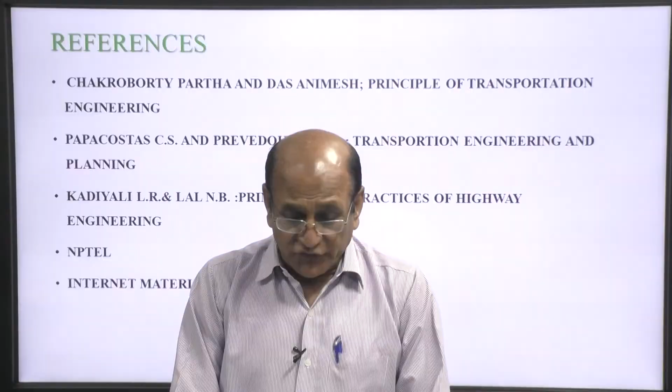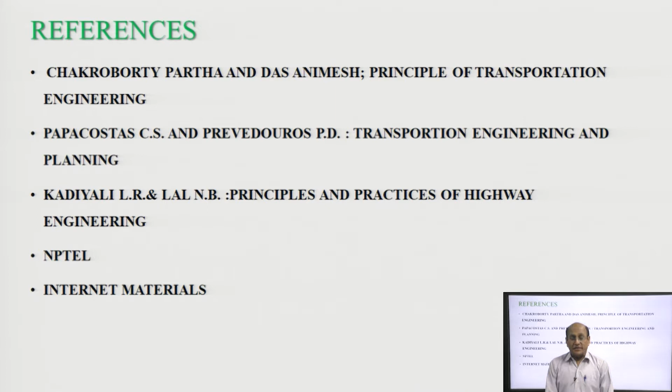The references we have taken are Chakroborty Partha and Das Animesh, Principle of Transportation Engineering; Papacostas CS and Prevedouros PD, Transportation Engineering and Planning; and Kadiyali and Lal, Principle and Practices of Highway Engineering. Some material has been taken from NPTEL and some from the internet.

Today's contents: trip distribution, introduction, basic considerations, trip distribution matrices, methods of trip distribution, growth factor method, uniform growth factor method, average growth factor method, Detroit method, and gravity method.

So, trip distribution matrices are of two types. One is the production-attraction, PA, matrix, and the second is the origin-destination, OD, matrix.

The production-attraction format of the trip table should be converted into the origin-destination format to get the actual direction of the trip between the TAZs.

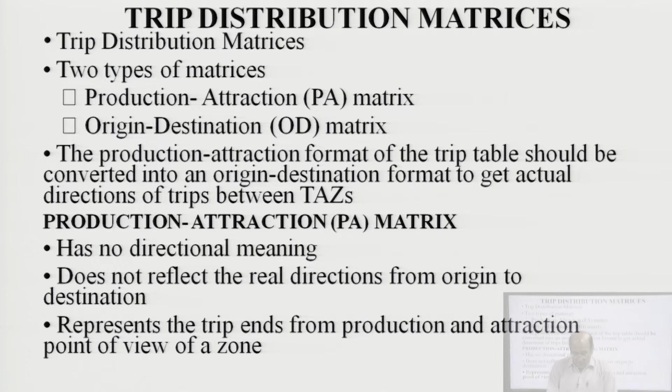The production and attraction, PA, matrix has no directional meaning. Whatever trips are produced or attracted have no direction, and it does not reflect the real direction from origin to destination. It represents the trip ends from the production and attraction point of view of a zone.

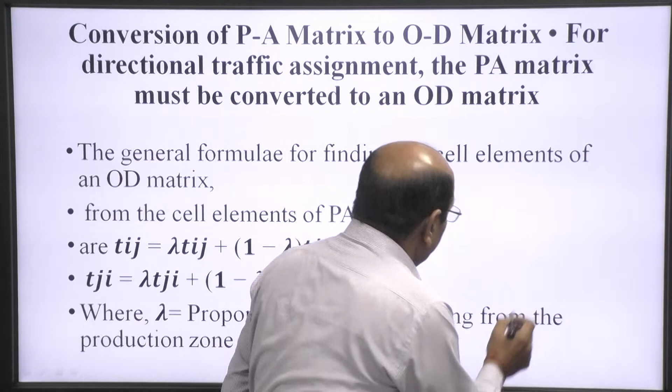As discussed earlier, we can prepare a matrix here. Generation G_I will be equal to the sum over I is equal to 1 to n of T_Ij.

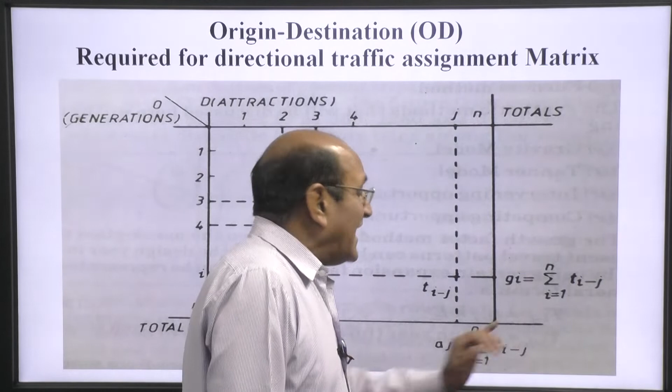And attraction A_j will be equal to the sum over j is equal to 1, I is equal to 1 to n, of T_Ij. This is the method by which we can prepare the matrix.

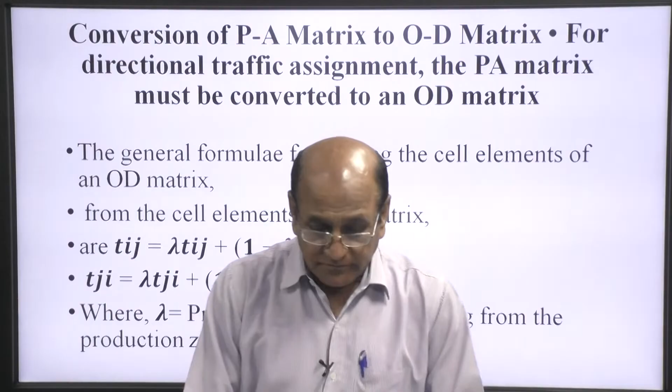Now, the conversion of PA matrix to OD matrix - for directional traffic assignment, the PA matrix must be converted to an OD matrix. The general formula for finding the cell element of the OD matrix from the cell element of the PA matrix is: T_Ij will be equal to lambda T_Ij plus 1 minus lambda T_jI.

This means the number of trips from the production zone to the attraction zone multiplied by lambda, which is a constant, plus 1 minus lambda multiplied by the trips from the attraction zone to the production zone.

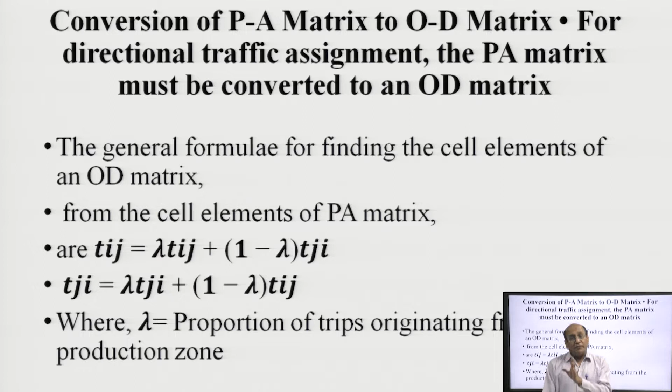So we can say T_Ij will be equal to lambda T_Ij plus 1 minus lambda T_jI, or T_jI will be lambda T_jI plus 1 minus lambda T_Ij, where lambda will be equal to the proportion of trips originating from the production zone.

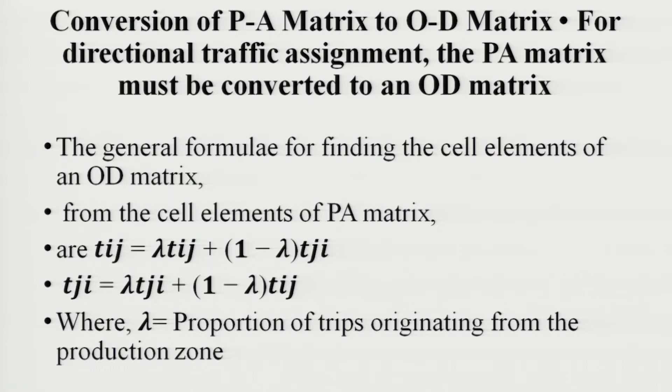Now come to the methods of trip distribution. There are two methods: one is the growth factor method and another is the synthetic method. In the growth factor method, there are the uniform factor method, average factor method, Detroit method, Fratar method, and Furness method. These are the different methods used within the growth factor method.

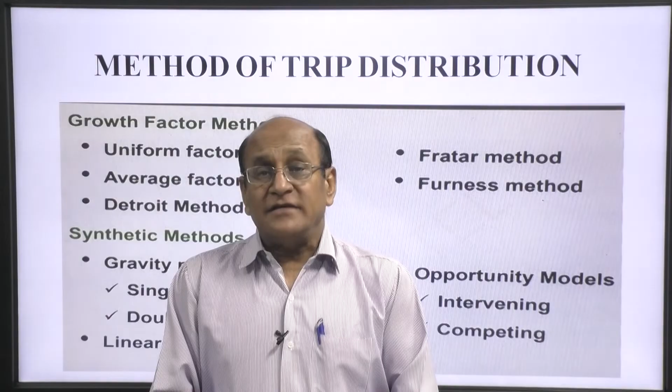We will discuss some of them, then come to the synthetic model, in which there is the gravity model, which includes the singly constrained model and the doubly constrained model. Then there is also the opportunity model, in which we will discuss the intervening opportunity model and the competing opportunity model, and another one is the linear programming approach in the synthetic model. So there are many methods used for forecasting the trip distribution.

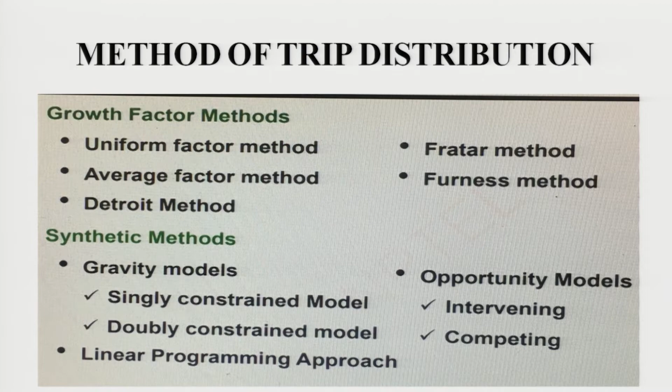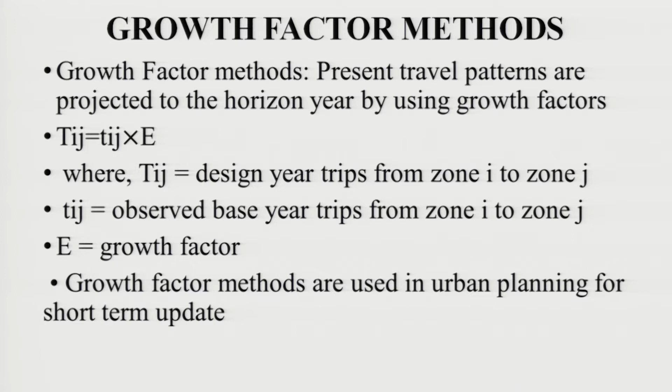First we will discuss the growth factor method. In the growth factor method, the present travel pattern is projected to the horizon year by using a growth factor, that is, T_Ij is equal to small t_Ij into E, where capital T_Ij is the design year trip from zone I to zone j.

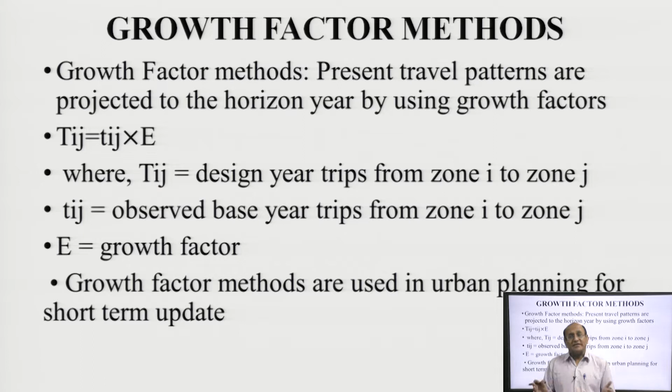Small t_Ij is equal to the observed base year trip from zone I to zone j, and E is equal to the growth factor. This growth factor method is used in urban planning for short term updates. If the tenure of the future forecast is a very short period, then this method could be used.

Now, come to the uniform growth factor method. A single growth factor E is assumed for the entire area under study for predicting the future interzonal trip from one zone to another zone.

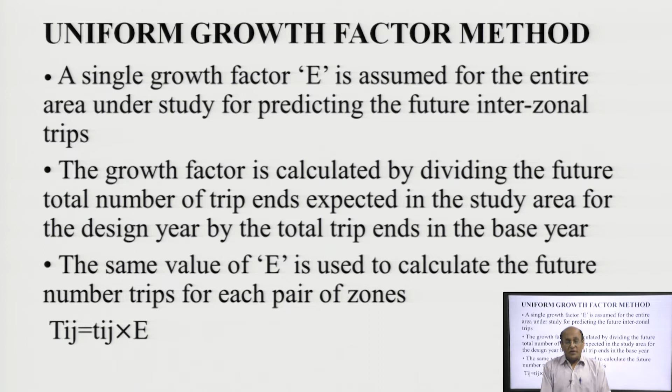The growth factor is calculated by dividing the future total number of trip ends expected in the study area for the design year by the total trip ends in the base year. The same value of E is used to calculate the future number of trips for each pair of zones, one zone to another zone. So, capital T i j will be equal to small t i j into E.

What is the disadvantage of uniform growth factor method? The assumption of a single growth rate for the entire area is not correct, because each zone will have its own unique rate of growth. Second, it underestimates and overestimates movement where present day development is limited and intense respectively.

If the present trip movement between two zones is 0, then the future trip movement between the same zones will also come out to be 0, which is impractical. So, these are the basic disadvantages of uniform growth factor method.

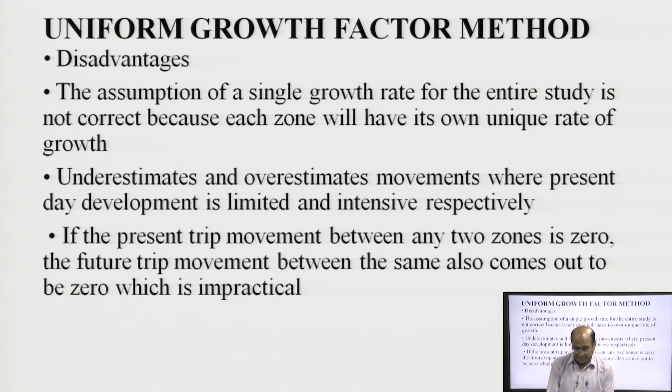Now, average growth factor method. This is another growth factor method. Growth factor for each zone is calculated based on the average growth associated with both the origin and destination zones.

So, capital T I j will be equal to small t i j into E I plus E j divided by 2, means average of production zone and attraction zone.

Where E I will be equal to capital P I by small p I, which is equal to the generated trip growth factor for zone I. E j is equal to capital A j by small a j, that is the attracted trip growth factor for zone j.

Small p I is the present generated trips for zone I. Capital A j is the future attracted trip for zone j. Small a j is the present attracted trip for zone j. T I j is the future trip from zone I to zone j. Small t i j will be equal to present trip from zone I to zone j.

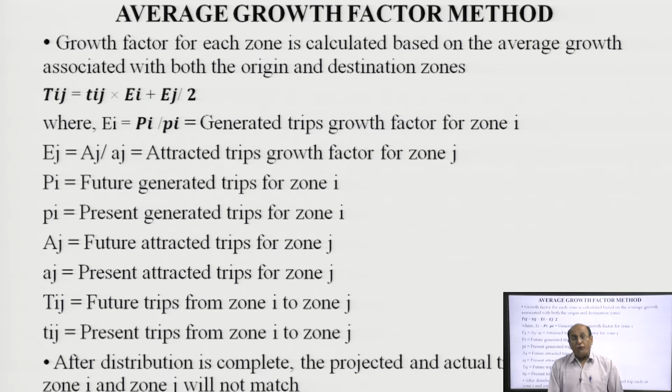After distribution is complete, the projected and the actual trip ends at zone I and zone j will not match, then we go for iteration.

This has to be overcome by an iterative process using new E I and new E j, calculated from E I equal to P I by small p I, and capital E j will be equal to capital A j divided by small a j, where small p I and small a j are the total generation and attraction of zone I and j respectively, obtained from the first stage of distribution.

The iteration is carried out till the growth factor approaches unity and the value balances within plus minus 1%.

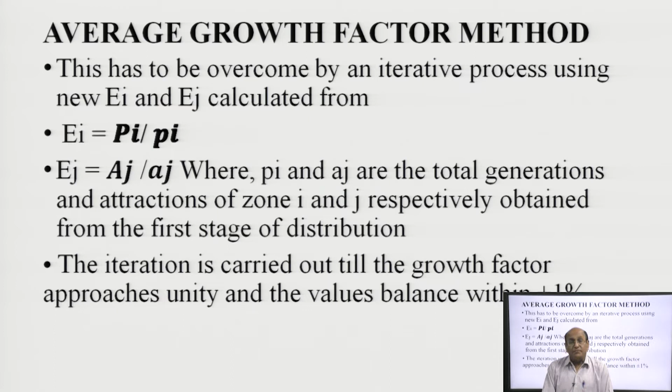Disadvantages of average growth factor method: the multiplying factor has no real significance. Second, there is no explanation for the movement between zones and the factors causing the movements. Next, a large number of iterations is required.

Next, if the present trip movement between two zones is 0, the future trip movement between the same zones will also come out to be 0, which is practically impossible.

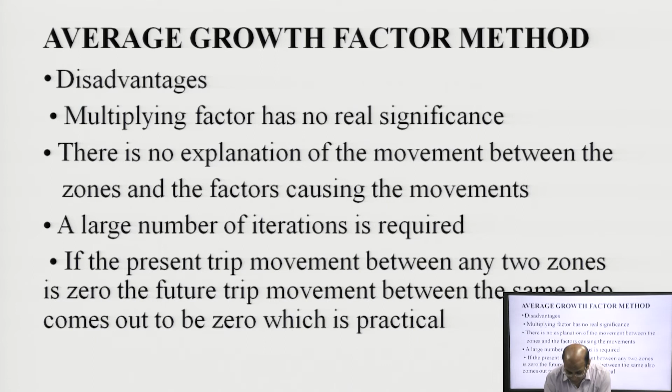Detroit method: it is an improved version of average growth factor method, if the growth factor for the zones and the average growth factor for the entire area are taken into account.

T I j will be equal to small t i j into E I into E j divided by E, that is the average, where E I and E j are generated and attracted trips growth factor for zone I and zone j respectively. E is the average growth factor for the entire study area.

In this method, the sum of the vehicle trips obtained may not agree with the estimate developed under the future trip generation. Hence, a series of iterations is performed, as in the average growth factor method.

Exception is that E is also iterated by computing the ratio of future vehicle trips in the urban area obtained from the estimate of future trips generated to the total future vehicle trips calculated in the urban area.

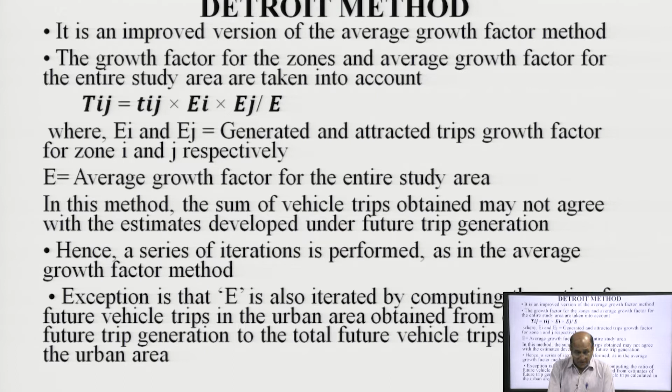Disadvantage of growth factor model: the present trip distribution matrix has to be obtained first. Large scale OD studies with high sampling size are needed so as to estimate the smaller zone to zone movement accurately.

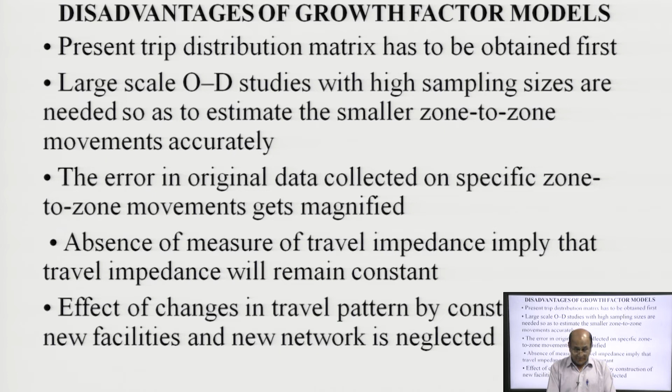Absence of the measure of travel impedance implies that the travel impedance will remain constant. Effect of changes in the travel pattern by construction of new facilities and new network is neglected.

So, we have covered these growth factor methods. Now, we switch over to synthetic method. Synthetic method attempts to discern the underlying cause of movement between places. Relationships are established between trips and measures of attraction, generation and travel resistance.

Synthetic method can be used not only to predict future trip distribution, but also to synthesize the base year flow.

Measures of travel resistance, impedance, may be in form of cost, time, or distance. Impedance is resistance in travel between two zones. Travel distance, travel time, travel cost and travel utility are indicators of travel impedance, as told earlier. Travel distance...

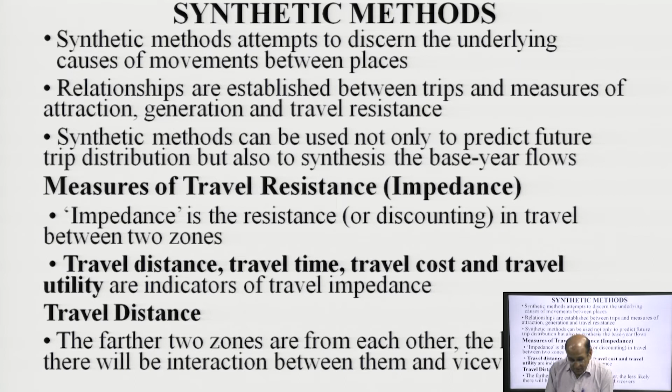Travel time: in real travel, travel time may vary by time of day, day of week and other factors. The difference in travel time can vary as much as 2 or 3 times between peak and off peak hours. Using only distance, however, these variations are never picked up because the distance between locations is invariant.

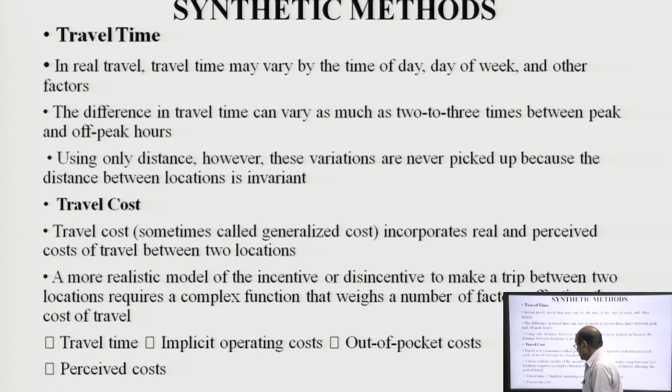Travel cost, sometimes called generalized cost, incorporates real and perceived cost of travel between two locations. A more realistic model of incentives and disincentives to make a trip between two locations requires a complex function that weighs a number of factors affecting the cost of travel, and they are: travel time, implicit operating cost, out of pocket cost and perceived cost.

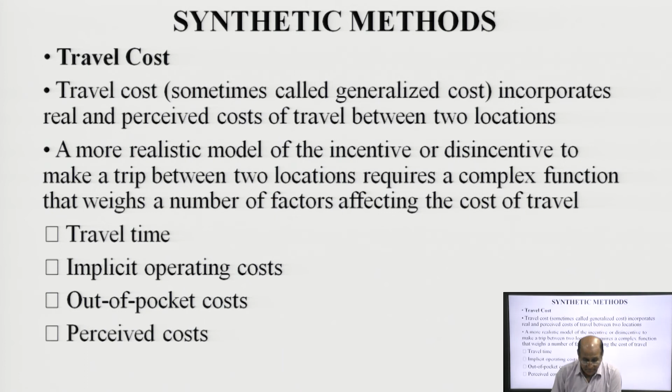Now come to the next, that is utility, travel utility. Utility is an individual concept rather than a zonal one. Usually, higher cost is associated with less utility, but the utility of travel for an individual is a function of both real cost and a number of individual characteristics that affect the value placed on that travel. Two individuals living next door to each other who travel to the same destination may price their trip very differently.

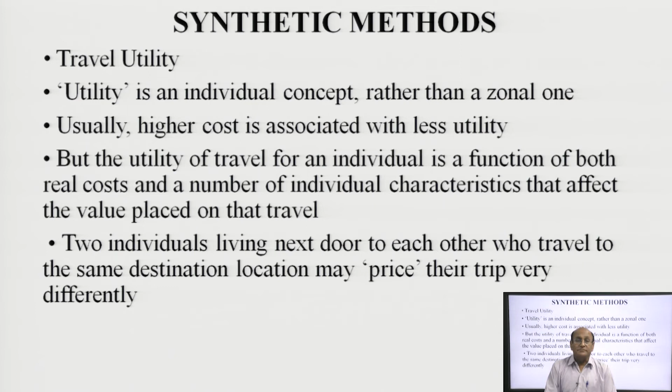Now come to the gravity model, which is widely used in trip distribution. As we know Newton's law of gravitation, where F equals G times m1 times m2 divided by d squared, F is the gravitational force acting between two objects, G is the gravitational constant, m1 and m2 are masses of the objects, and d is the distance between the centers of the masses.

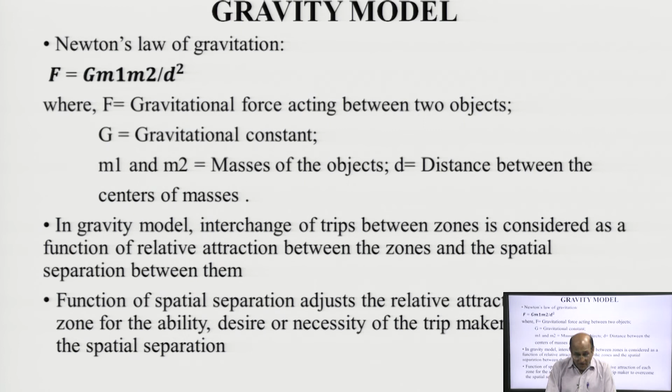In the gravity model, interchange of trips between zones is considered as a function of relative attraction between zones and spatial separation between them. The function of spatial separation adjusts the relative attraction of each zone for the ability, desire or necessity of trip makers to overcome the spatial separation.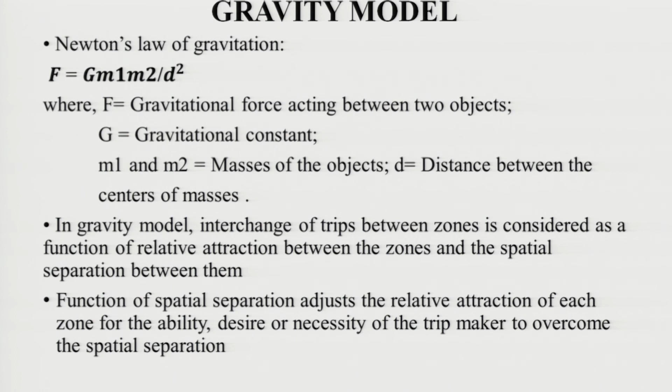The main assumption of the gravity model: the number of trips between two zones is directly proportional to the number of trip production at the origin zone and number of trip attraction at the destination zone. These are proportional to the trip generation in the future, and inversely proportional to the travel resistance or travel impedance. That is, Tij equals alpha times Pi times Aj divided by dij to the power n, where Tij is trips between zone i and j, Pi is trip produced in zone i, Aj is trip attracted in zone j, dij is the distance between zone i and zone j or time or cost of travelling between them. Alpha is the constant and n is the exponential constant whose value is usually found to lie between 1 and 3.

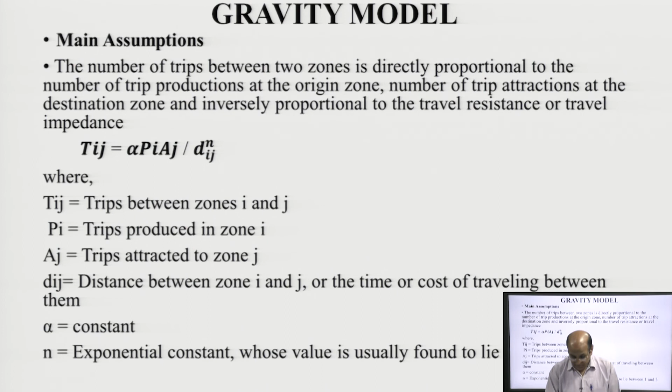Types of gravity models: singly constrained models - production constrained, sum over j of Tij equals Pi. Attraction constrained, sum over j of Tij equals Aj, the attraction in zone j. In the doubly constrained model, sum over j of Tij equals Pi and sum over i of Tij equals Aj.

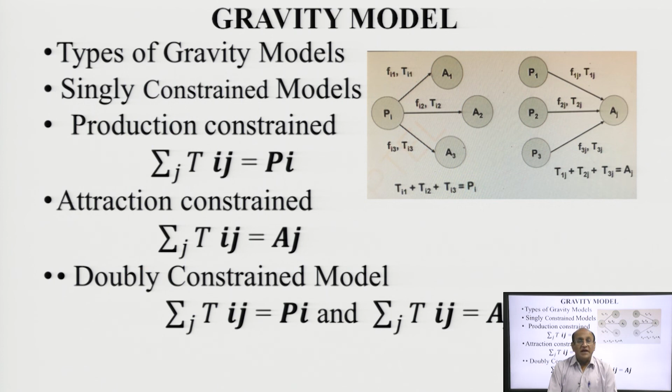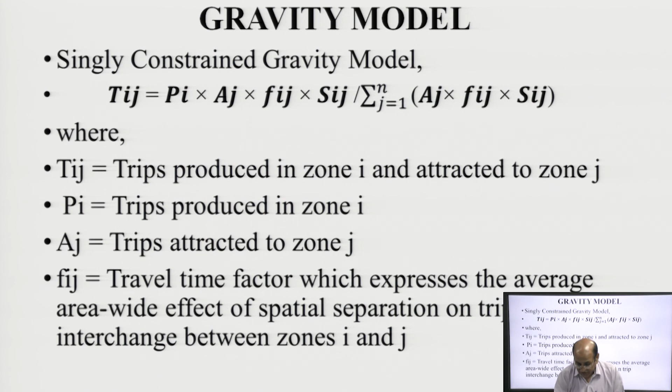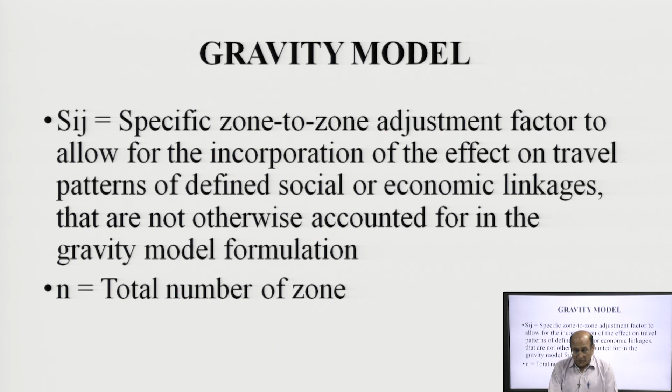So singly constrained gravity models are: Tij equals Pi times Aj times Fij times Sij, divided by the sum over j equals 1 to n of Aj times Fij times Sij, where Tij is trips produced in zone i and attracted in zone j, Pi is trip produced in zone i, Aj is trip attracted in zone j, Fij is the travel time factor which expresses the average area-wide effect of spatial separation on trip interchange between zone i and zone j. Sij is a specific zone-to-zone adjustment factor to allow for the incorporation of the effect on travel patterns due to defined social or economic linkages that are not otherwise accounted for in the gravity model formulation, and n is the number of zones in the study area.